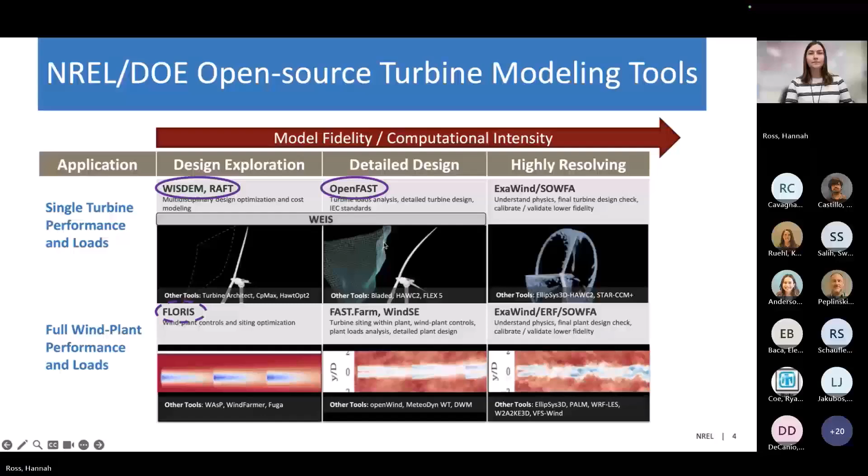All right, so the capabilities of OpenFAST. It originated, like I mentioned, as a wind turbine modeling code for land-based wind turbines, and then was expanded to offshore, fixed and floating. And then we have further adapted it now for fixed and floating marine turbines.

So the idea behind OpenFAST is that it's an engineering model, so it couples together models to simulate the aerodynamics, hydrodynamics, servodynamics, control, structural dynamics, that sort of thing, in these different modules that I'm going to dive into a little bit further.

In its base operation, OpenFAST computes nonlinear dynamics in the time domain, but it can also be linearized. And this nonlinear simulation enables loads analysis for predicting system ultimate and fatigue loads. So again, the application of running lots of load cases for a design, running against the IEC standards, looking at the loads that the turbine is experiencing.

And then on the right here is just a cartoon to show some of the different physics that are captured now for marine turbines in OpenFAST. So we have added mass on the blades and the tower or support structure. We have buoyancy now on the rotor. Neither of those pieces were there before for wind turbines. They were present for the support structure modeling, but we've now added them for the rotor as well.

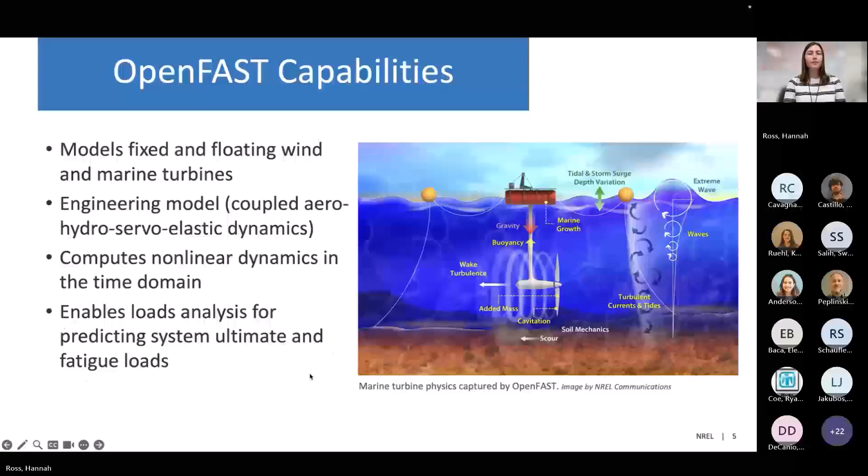And like I mentioned, OpenFAST can also be linearized about a given operating point. And so this enables further analysis, modal analysis, controls design and instability studies, that sort of thing. So it can output the equations needed to generate or use a linear model.

And then the basic structure of OpenFAST itself is really what we refer to as the glue code, and it couples together these independent modules that model specific dynamics. So there's a module that models the rotor aero- or hydrodynamics, a separate one for the support structure hydrodynamics, a separate one for the structural dynamics of the rotor and tower, etc.

And this OpenFAST glue code couples together each of those modules and passes the needed information from one module to the other. And when the original FAST was rewritten as OpenFAST, this modularization was emphasized to enable data encapsulation for specific physics and components. And that enables more code flexibility in that certain modules can be run by themselves.

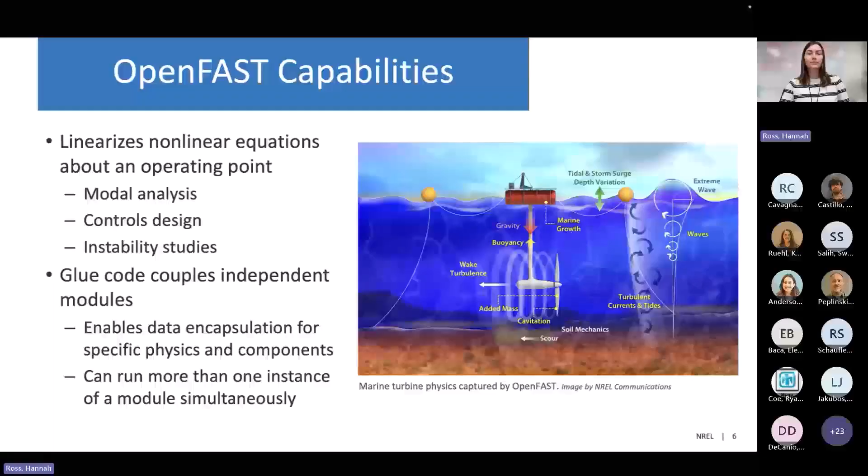So like I said, some work over the past few years has really emphasized adapting OpenFAST for marine turbines from wind turbines. And the capabilities that we identified as really needed to more accurately model marine turbines are listed here. So as I mentioned, buoyancy on the rotor, nacelle, and tower, again, not considered for wind turbines, but something that we need to put in there for marine.

The calculation of inflow accelerations. So the way that the inflow was set up was separate inflow seen by the turbine and then by the support structure, as you can imagine, makes sense for a wind turbine. But for a marine turbine, the whole structure is experiencing the same inflow subject to waves and currents.

And so we needed to be able to calculate the inflow accelerations from turbulent currents in order to account for fluid inertial loads. So that's something that was added. This was done again for the waves, but not for the currents. And so now we can capture those fluid loads from turbulent currents in the accelerations on the rotor and the support structure.

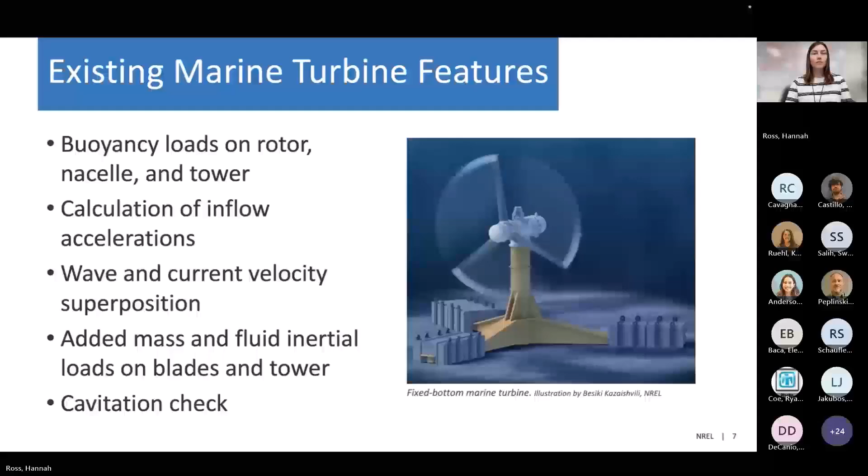All right, so WPTO has been supporting a lot of this OpenFAST development, and we have an ongoing project called ACUAREUS that is adding more features for marine turbines, and those I've listed out here. So these are some additional features that were identified as important but weren't able to be included in the original scope of these modifications for OpenFAST.

And the first is lifting loads on faired towers. So a lot of marine turbine designs do have the tower or the support structure connecting to the rotor with a faired design to minimize flow disturbance and impact on the power performance. And we want to try and capture any lifting loads that might come from this airfoil shape of the tower.

So right now, as the tower is defined in AeroDyn, the typical way it's done, it just assumes that it's a cylindrical shape, again, which is most common for wind turbines. And so we're adapting that to have some more flexibility to capture these different shapes that marine turbines come in and the associated loads with that.

We're also adding a dependence on the KC number in the loads on the support structure. And I'll talk a little bit more about that when I address the HydroDyn module. But this is just to try and increase the accuracy somewhat for the coefficients that are used in calculating the hydrodynamic support structure loads.

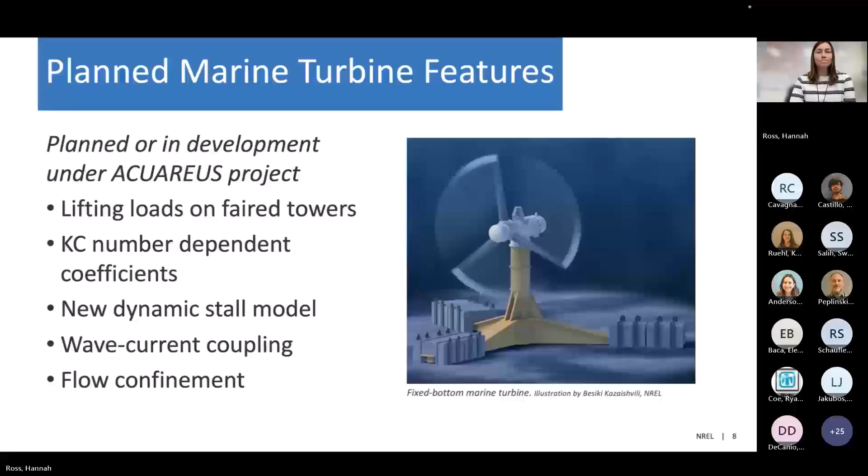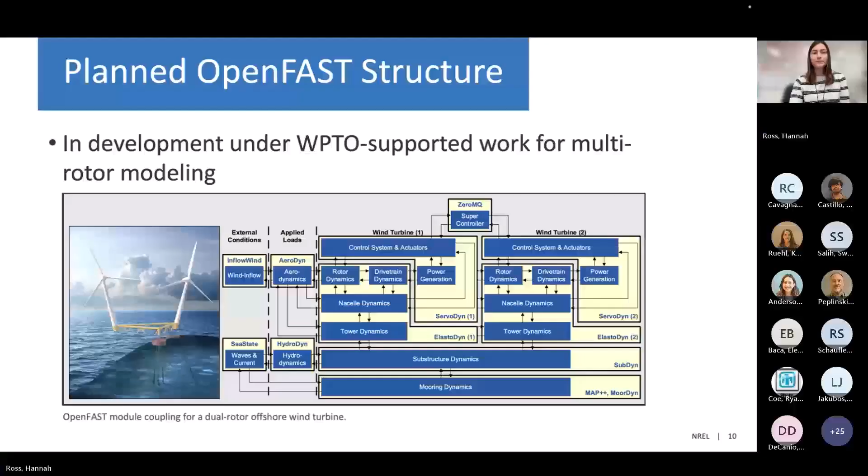This work also includes the implementation of a supercontroller to allow talking between the controllers of each of the rotors on the support structure. So that's what it looks like for multiple rotors and where we're headed with that piece of development. So now I want to dive a little bit more deeply into each of the modules, what they model, the dynamics that they represent, and some of the theory that is underlying each of them.

Yeah, Swar, did you have a question?

Sorry, that was an accidental raising my hand. Please keep going on. No worries.

Yeah, so I think it's helpful to get an understanding of the assumptions that underlie these models and what we're actually doing when we piece together each of these different submodels to model these different dynamics.

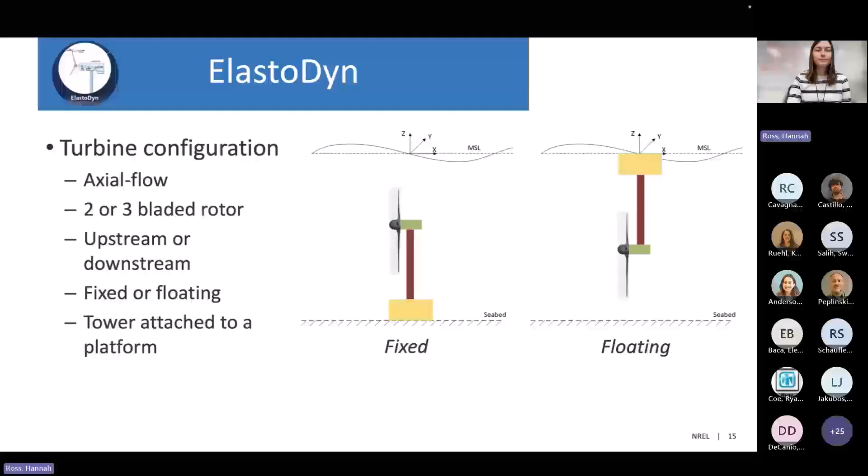There's two structural representations in ElastoDyn, like I mentioned. One is a multi-body, which is used to model the platform, the nacelle, the hub, and the generator, so all the masses and inertias associated with those pieces. The platform rotations assume a small angle approximation, but the other multi-body degrees of freedom, the nacelle, hub, and generator, can exhibit large motions.

And then there's a separate representation for the blades and tower. This is a linear modal representation, again, a small angle approximation. And here, these dynamics depend on user-specified mode shapes. So the user has to actually go in and input what the mode shapes and frequencies look like for the blades and the tower. It assumes straight and isotropic beams and looks only at bending degrees of freedom and not twist.

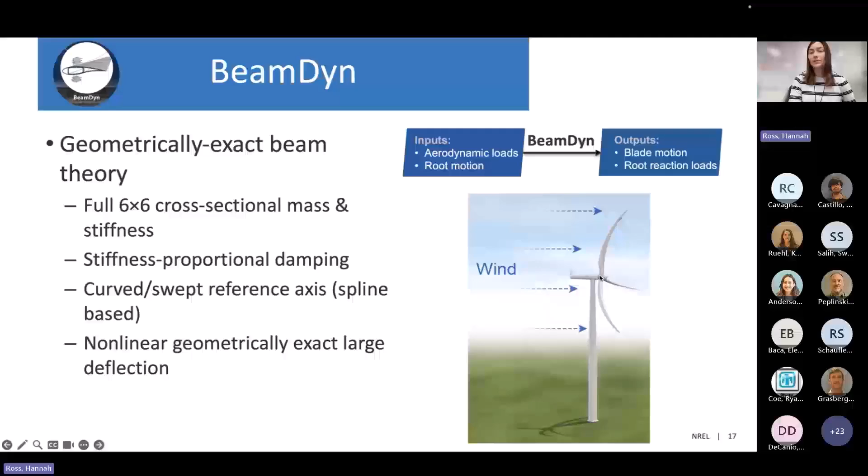And then AeroDyn, which again is the rotor, aero, and hydrodynamic model, has two options for solving the rotor behavior, blade element momentum and free vortex wake. And these can be used one or the other.

And then it also includes a couple different models for the airfoil dynamics, a quasi-steady model where the user-defined lift and drag coefficients are just kind of used directly, and then an unsteady model which employs empirical dynamic stall models to add corrections on top of those lift and drag coefficients to try and account for the effects of dynamic stall. But both of these models rely on user-specified polars. So these are inputs that have to be provided by the user, the lift and drag of the airfoils that make up the turbine blade.

And then AeroDyn also includes some representations of the interaction between the tower and the rotor, as well as the effects of tower drag. So the drag on the tower, and then the tower dam and shadow models to try and capture what the effect would be on the rotor of the presence of the tower and the inflow that the rotor is seeing. So for AeroDyn, we have the turbine displacements and velocities and the wind velocities, and then it calculates how those translate into the aerodynamic load that the rotor is seeing.

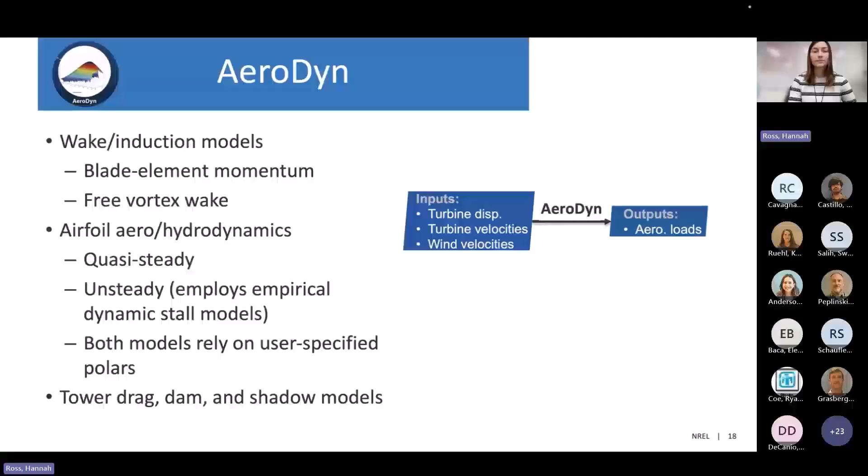And then a little bit of detail just on each of the specific theories in AeroDyn. The blade element momentum is an industry standard implementation, so combination of momentum theory and blade element theory, which solves for the induction factors that are used to calculate the power and thrust coefficients.

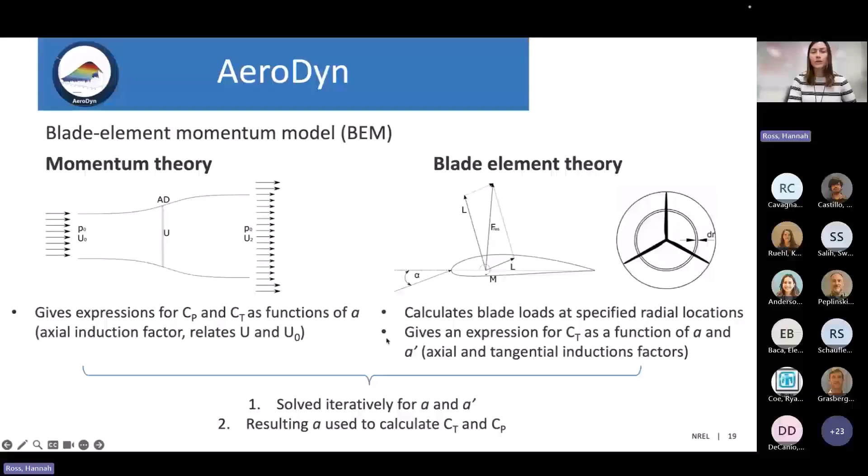And then the free vortex wake model that was implemented, which is called OLAF within AeroDyn, takes a different approach to the rotor hydrodynamics. So it's a Lagrangian approach, and the wake is discretized into markers connected by vortex filaments. So in the near wake, it's a hybrid lattice, and then a filament for the tip and root vortices. This is kind of higher fidelity than the blade element momentum approach. It's also more computationally intensive, but it is more flexible.

And so within AeroDyn, there is now the capability, I mentioned, to model multiple rotors already. And so when AeroDyn is run by itself, it can model with OLAF any sort of arbitrary collection of lifting bodies. And so this vortex representation enables those hydrodynamics to be captured, and the vortices and the wake produced by the various lifting bodies to interact. So it enables more kind of flexible modeling and will be advantageous to be used for the multi-rotor representation when we want to see what the effect of one rotor on the hydrodynamics of another is.

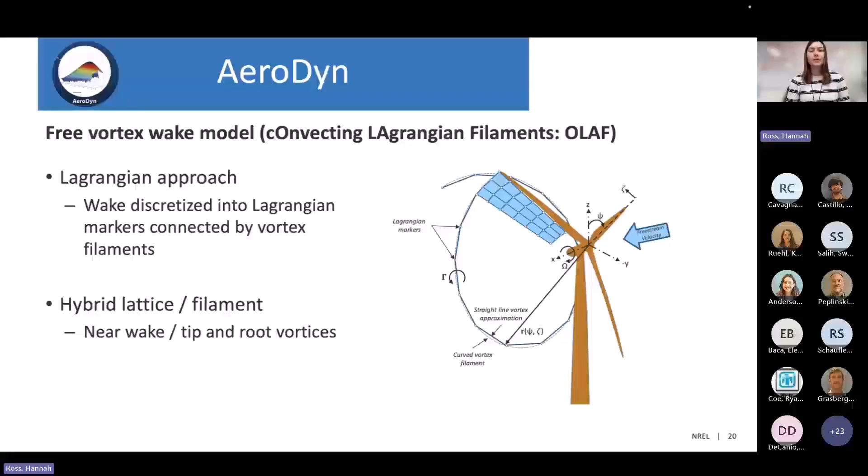And then the InflowWind module, this provides information about the inflow velocities and accelerations. And this can be, again, for winds or for current. And there are a range of ways that we can define the inflow in this module. So it can just be a steady, non-sheared inflow. It can be uniform across space, but time varying. It can have full field turbulence representations provided by several different sources. So the TurbSim turbulence generator, or from the wind turbine modeling codes Bladed and HAWC2, or we can have user-defined full field inflow inputs.

So for InflowWind, this inflow information is pre-computed, and then different positions are queried by the modules that need them. And then the flow information at those specific points is passed to the modules that are asking for that.

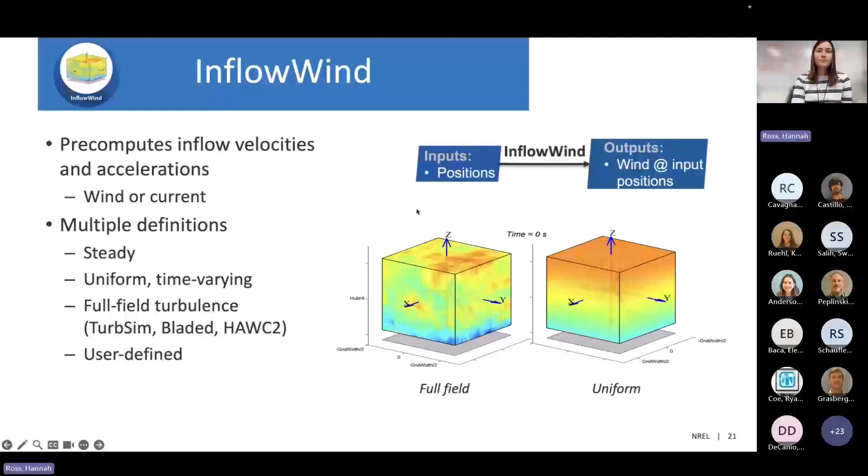And then SeaState, which is kind of the analog of InflowWind for the wave definitions, pre-computes wave velocities and acceleration. So it can do regular, irregular, or white noise waves using these different spectrum definitions. It defines wave direction and includes directional spreading. And like I mentioned, it can also define these three kind of simple current profiles within SeaState. But for marine turbines, we want to use the InflowWind definition of current so that the full system is seeing a consistent inflow, and we can represent turbulence if we want to.

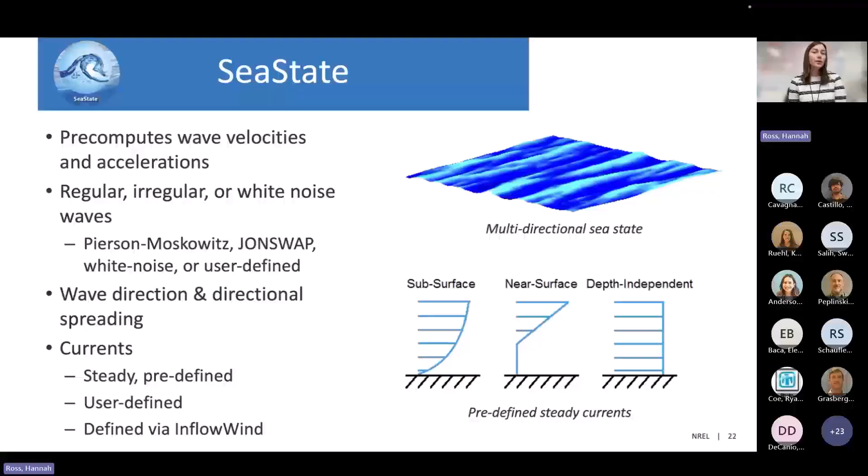There's also a potential flow representation, which uses inputs from WAMIT or some other boundary element code. It's typically used for larger platforms with pieces or elements that have larger diameters, and models the radiation, diffraction, and buoyancy loads. You can also do a hybrid combination of these two models. For HydroDyn, it takes in the substructure displacement, velocity, and acceleration - just the structural information - and outputs the hydrodynamic loads from the fluid forcing.

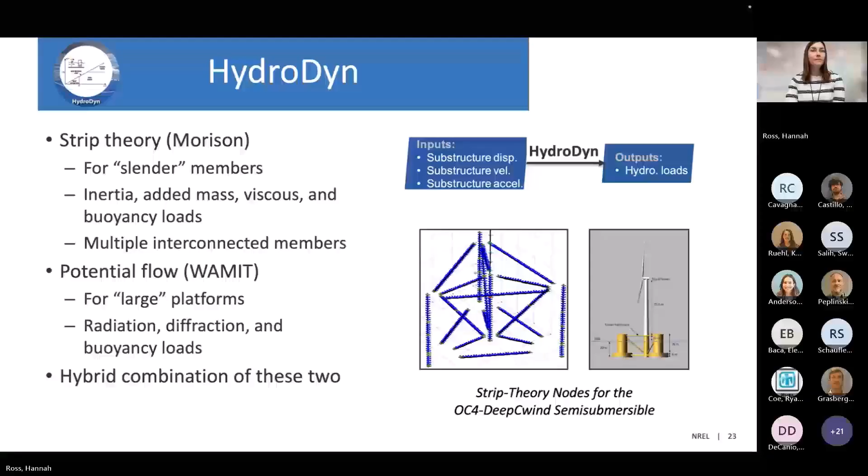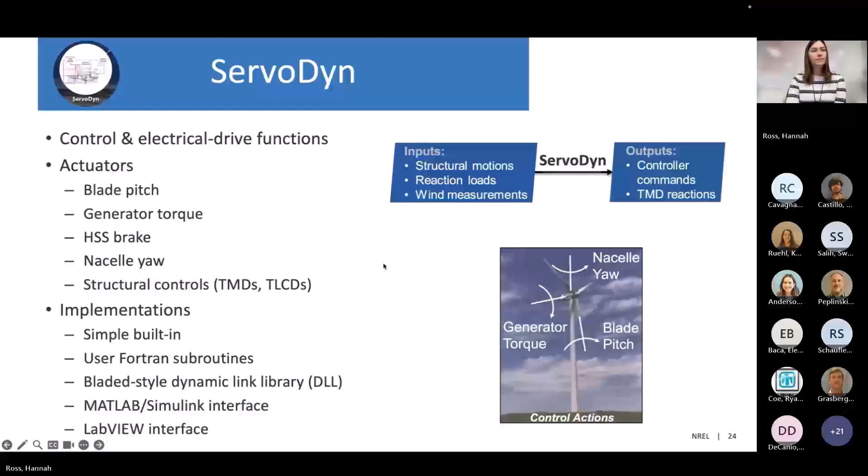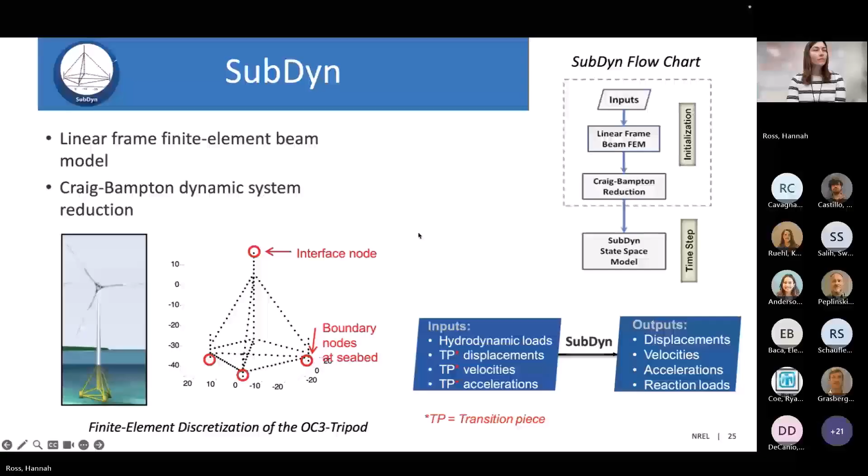So that's it for a quick run through of all the different module theories. Thanks, Jason - Jason has added extra explanation here about the soil structure interaction. Feel free if you have any more theory questions or questions about the modules to raise your hand or put it in the chat. Otherwise, I'll go on to talk a little bit about what the outputs look like and some additional ways that OpenFAST can be used before we take a break and jump into the demo.

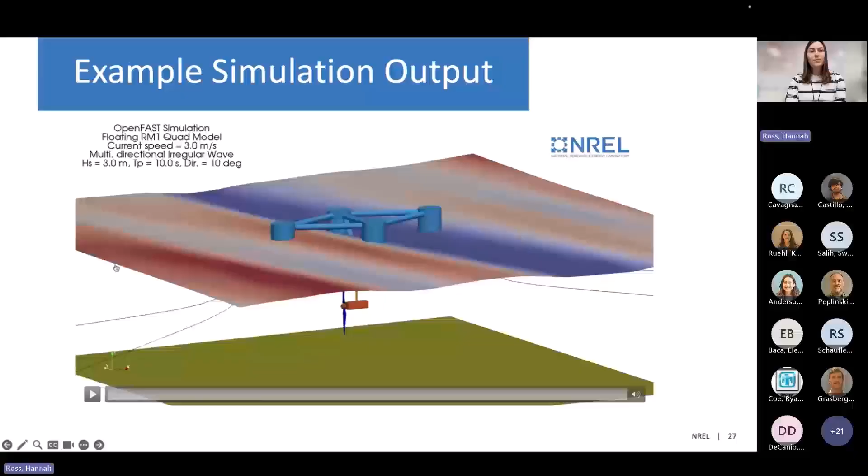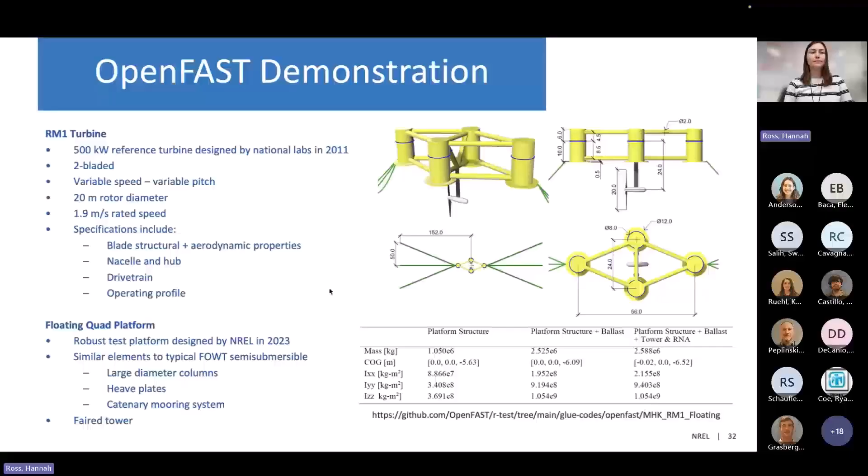As we add more capabilities, we are building these out. So I hope to have an example case for a marine turbine that uses BeamDyn, SubDyn, et cetera in the future. But for now, these are the modules we're going to look at within the example cases.

And then for the first simulation, at least, we're going to look at steady 1.9 meter per second current, which is the kind of rated operating condition for the RM1, with power law shear for the inflow, no control. So we don't have ServoDyn connected. We just have a fixed rotational speed specified. And then we have only the platform degrees of freedom turned on in this simulation.

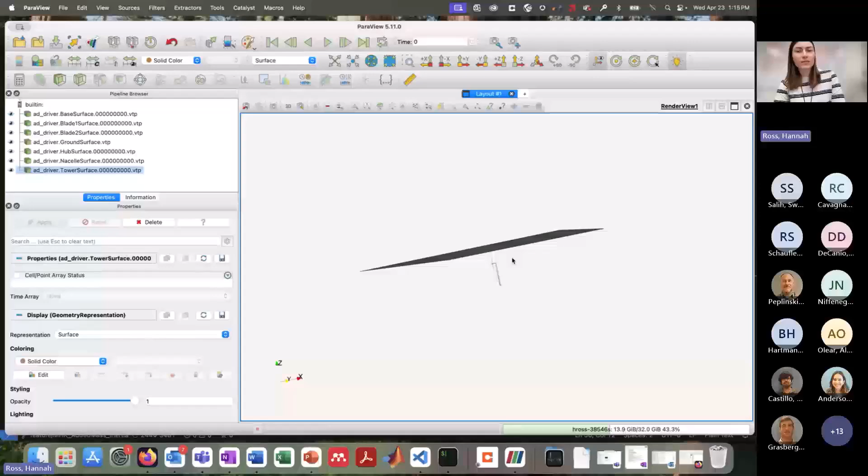And then we can adjust the viewing here in ParaView to see the outputs. So we can hit this button with the four arrows pointing out to adjust to the screen size. And then the navigation, as far as turning the view, is probably different on your device, depending on if you have a Mac or Windows device or how your mouse commands are set up. But you can control shift click to experiment with changing the view. And you can also use these standard views to get a side or top or front view of the turbine. And then we can do this magnifying glass zoom to zoom in.

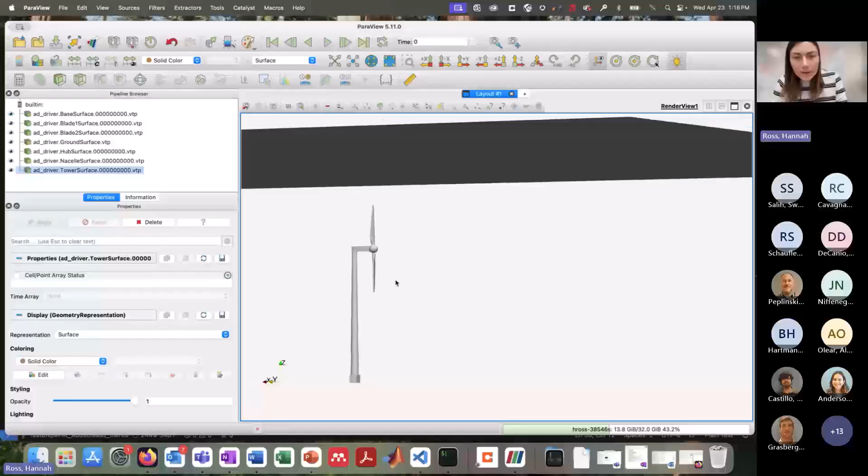And so what we're looking at here is this fixed turbine case. And so this flat top part here is what's defined as the ground surface. In this case, it's the water free surface. So you can toggle each file off and on to show what corresponds to what, the different blades, the base surface, the hub, the nacelle, etc.

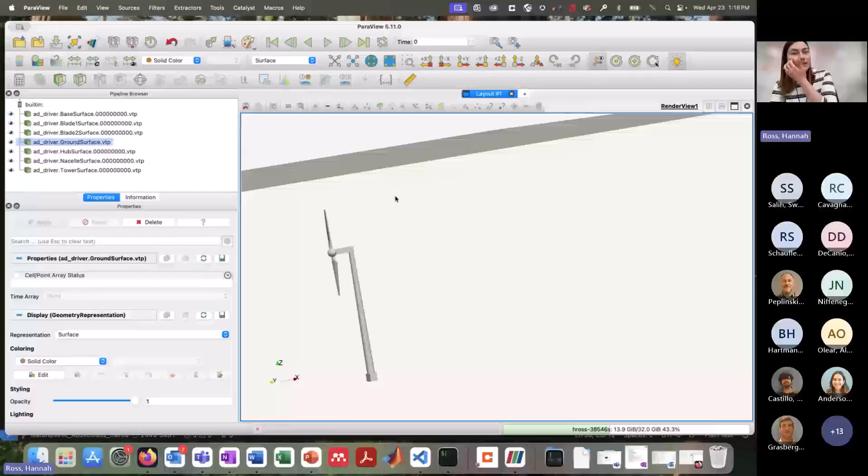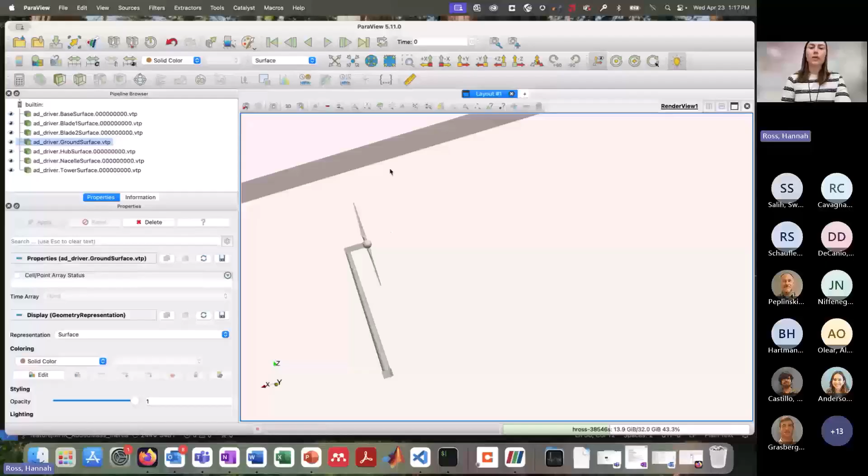But I think it's really helpful to be able to look at the location of the turbine relative to what is defined as the ground surface, so in this case, the sea surface. So again, this is the fixed turbine, and so we're expecting to see the free surface up above with the tower and the base below. And then we'll run the same thing for the floating, and I want to show you what that kind of layout looks like in comparison.

All right, any questions on that so far? Yeah, Rudy. Can OpenFAST model fully submerged platforms that are not piercing the surface for MHK? Yeah, it can be either surface piercing or not. You just kind of specify that location.

So we're now going to rerun, but for the floating case instead of the fixed. So now we're running this AeroDyn driver floating case. We're specifying that it's in the floating folder, but the same top level file name, just the common naming convention. And you can see here now the creation of these .sum, .out, and VTK files. So now we have the VTK files for the floating case.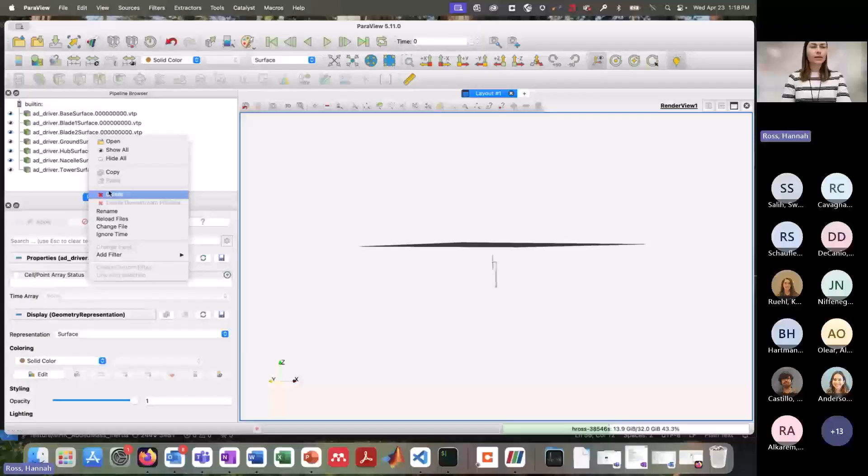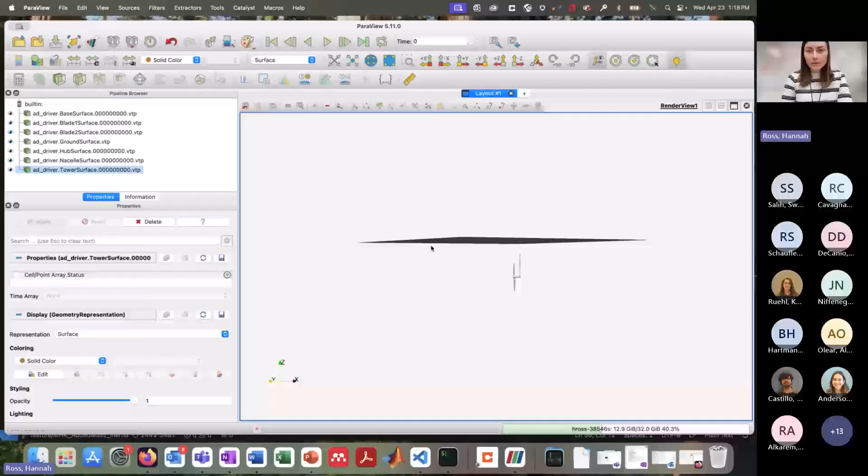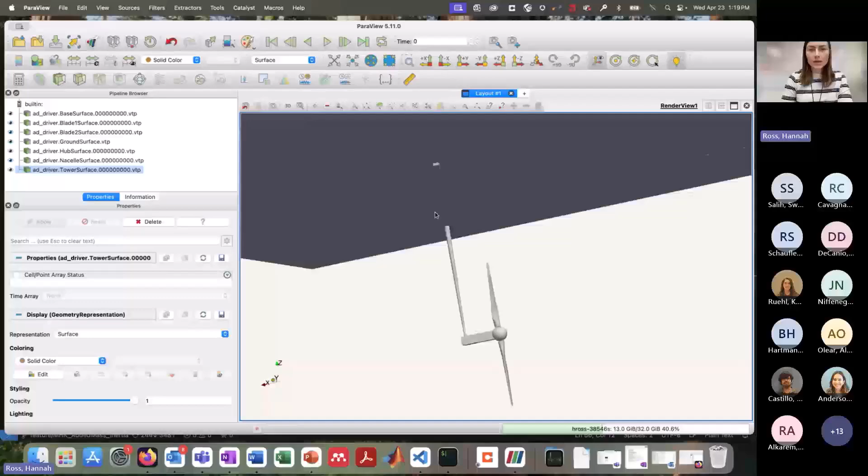We can go in and shift, select, and delete, hopefully all of them at once. So clear out the fixed case files and then go in and open up the floating case files. Apply. And then we'll adjust our view here, and you can see that we now have the turbine base as being defined up here at the sea surface, and then the tower, nacelle, hub, etc., coming down from that.

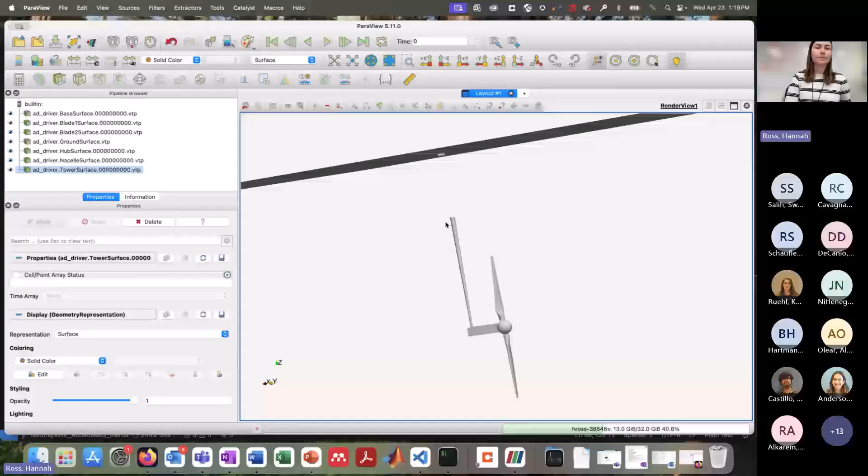There's a gap here just because this is where the platform would be, and the platform's not modeled in AeroDyn. So we're just modeling the tower and then the rotor, and that model in AeroDyn starts a little bit below the sea surface. But again, we can prescribe motion of this part of the turbine as if it was connected to a platform, and you can see what the rotor performance aerodynamics are for that prescribed motion. All right. Any questions on that?

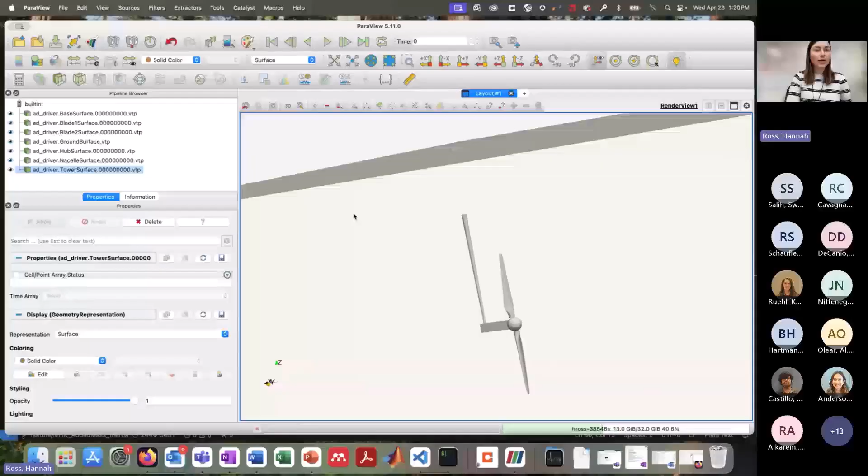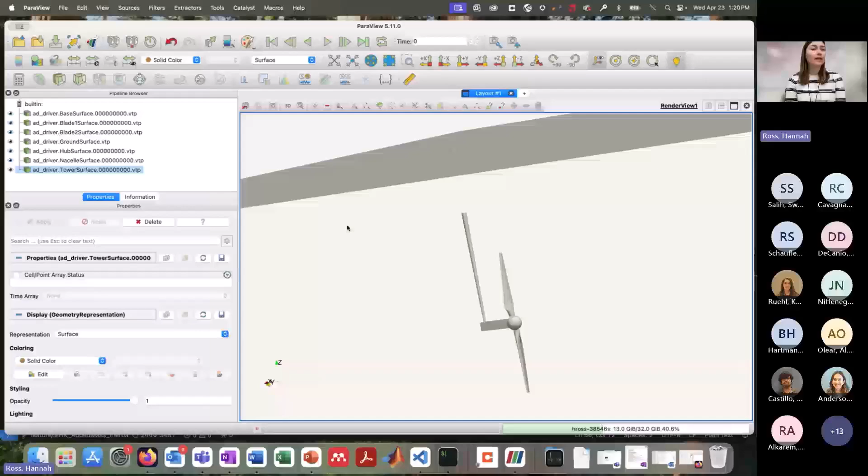Yeah, apologies that that didn't seem to be working super well on CoCalc. But hopefully this gives you an idea of the kind of visualization tools that you can use and the high level method for running OpenFAST simulations, the files that are required, the ways that you can change the inputs, that sort of thing. We've got about 10 minutes left. If there are any last questions or asks for demonstrations of a particular case, I'm happy to take that.